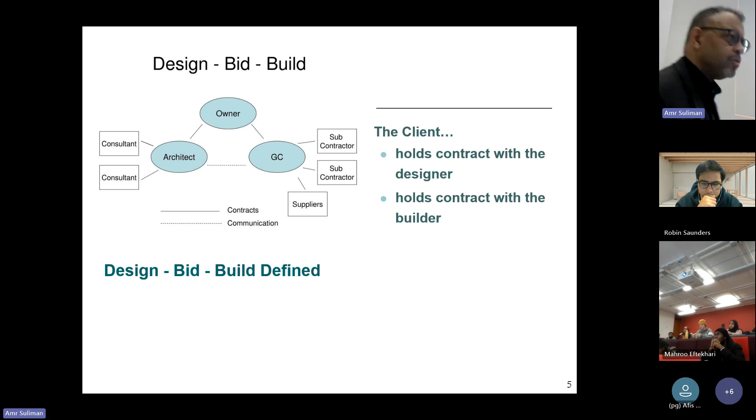And that arrangement, and I can use this guy to point, eh? Yeah, the owner hires architect engineer and hires a GC, a general contractor or a main contractor, and the owner maintains contractual arrangements with those two parties. So you have this triangle formed of the owner, with design on one side, construction on the other side, and there's communication between the designers and constructors, but they don't have a contractual relationship. And that can become kind of important in terms of getting things done.

But in that arrangement, because the owner, the client, has the contract with those two parties, they hold the contracts, they warrant that the design is suitable for the intended purpose. It is expected by the general contractor that the design provided to them by the owner, prepared by the architect and engineer, will get them what they want, will get the owner what they want, that it's a proper design. Keep that in mind as we get to design build. In this arrangement, the owner is responsible to an extent for the architect and engineer's work in the context that the architect and engineer are agents of the owner. Now, if the architect and engineer make mistakes, the contractor would sue the owner, and the owner would go after the architect and engineer for the mistake. So that's part of the process there. But anyway, the owner has to manage that relationship. Okay.

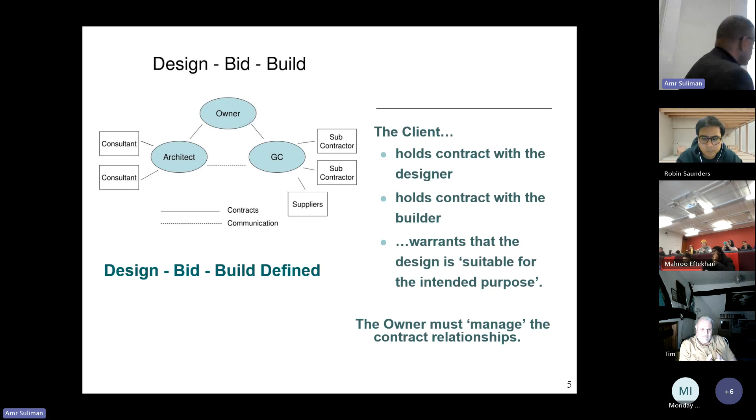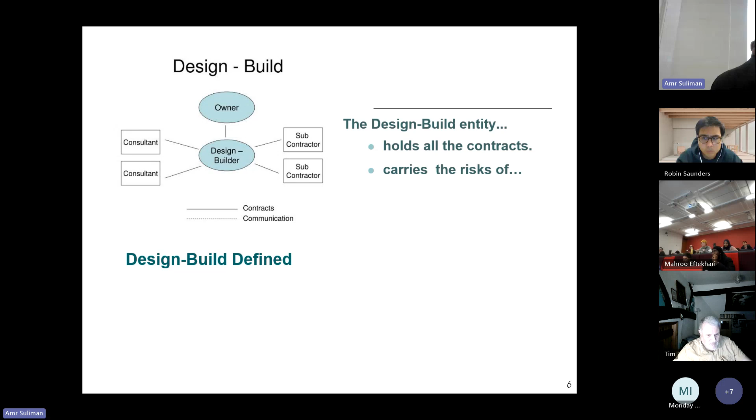In design build or design and build—in the US we just use a dash, but it's the same thing—in a design build arrangement...

The owner contracts with a designer-builder. That designer-builder, in most instances, will have all of the subcontracts and may indeed have the consultants, the architect, the engineer, and all of the subcontractors for mechanical, electrical, and other building systems.

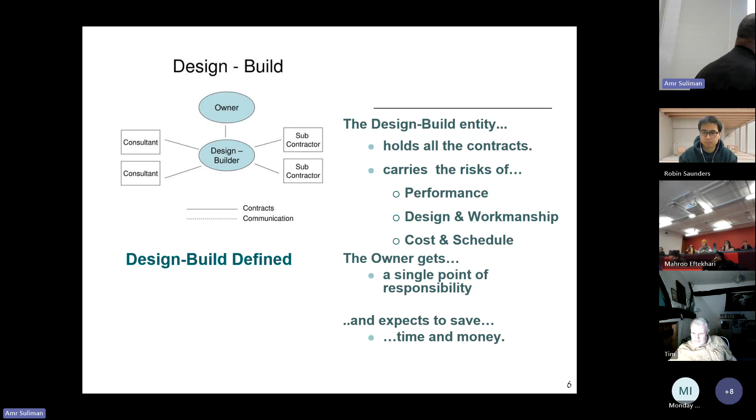In that way, the owner's relationship is strictly with that designer-builder. Because of that, the owner is not necessarily responsible for the integrity of that design, since the owner is not providing it—the design builder is. That can become very important because of issues that can arise with understanding or interpreting the design and properly getting the project built.

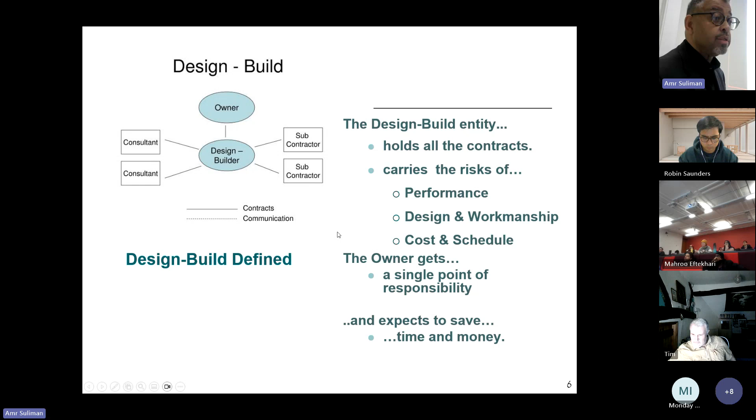So why would an owner want to do that? Because it's a single point of responsibility—they only have to talk to one person. And because the design and construction process are combined, theoretically you are going to save time and money.

That's the question here—this is where you theoretically save it. In theory, because I don't do detailed drawings and specifications, which are used to bid the job and give to a contractor to put together a price, the owner should save time. The project should save time, right?

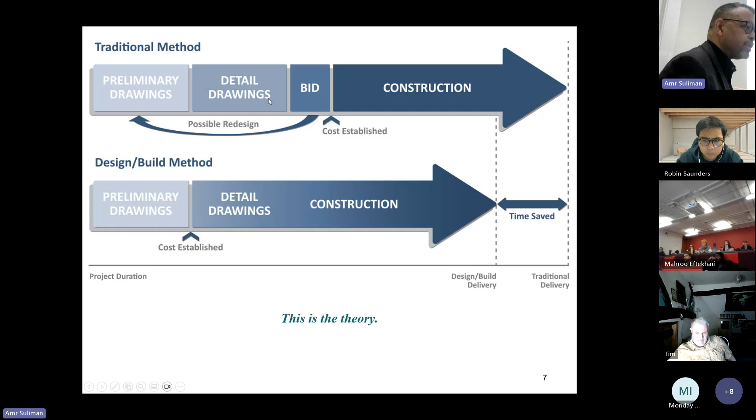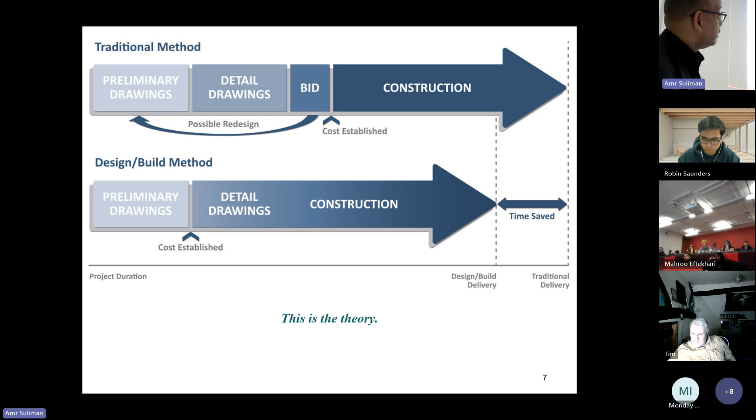Does it save time? It's a theory. I'm not going to say it doesn't work, but that's the premise. You get your project done quicker, and time is money in many instances—there's a dollar value associated with that process. So that's why it's done.

Now there are some concerns as to why you would not do it, and some of these concerns pop up in the UK as well as in the United States. One of the principal reasons is that architects and engineers generally are professionally licensed and registered to provide the service, while contractors in many instances are not licensed in the same way. So you could have what are considered professional services—design—being provided by what might be considered non-professional entities.

If the contractor owns the contracts and subcontracts the work to designers and engineers, that's a concern. The concern about the professional services issue is that professional licensure requires a commitment to public health, safety, and welfare, and that supersedes all the other stuff you might do. Anything else you might do, if you have a license, the public health, safety, and welfare issue rides predominant over all of that as a design professional.

And so some concern can be had in a design build arrangement, whether or not that commitment is still remaining paramount in the whole process.

The other thing is, when I showed you the picture of design-bid-build, you have an owner with an engineer on one side and a contractor on the other. Often there may be discussions or some disagreement about which pathway to go on a particular design element, or what material to use.

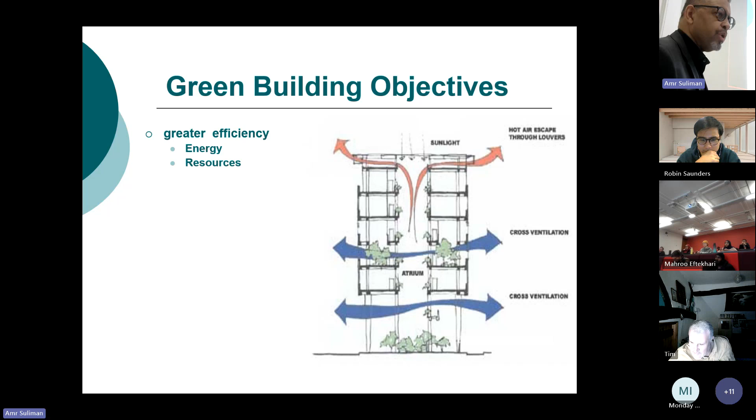So what about the green building stuff, which I'm sure is the thing that makes people get all excited? Green building objectives - we're trying to achieve better efficiency, better use of energy and resources, energy and water mostly. Sorry, I have an accent from the United States, so I talk funny. But that's probably the predominant general interest in green buildings or sustainable design. Anybody work on any green buildings here?

Okay, so a big item that's happening more and more now - I believe you have a mandate in the UK for a life cycle cost assessment. And there's some discussion about what's called cradle to grave, or actually cradle to cradle, and the idea of dismantling the building and recovering, recycling things. I want you to think about that for a moment. I'm entering into a contract with a person today about the design and construction of a building, and they have to guarantee some level of recyclability which might occur 20 or 30 years from now.

I could see where that would get a bit dodgy possibly. I'm making a bet on what I'm going to be able to do with that stuff 30 years from now. Do you feel lucky? That's kind of a nice thing. But anyway, that's a happening thing here.

One of the other big pushes is, of course, green buildings, healthier indoor environments, indoor air quality, and the broader spectrum of indoor environmental quality, where you get into sound and light and everything else. Waste management during construction, and to an extent in operation, we should have less waste.

Productivity—one would assume, and it's documented, that it's rational when you think about it: if I have a nicer building, people will work better in that nicer building. They will feel better, they will work better, they'll be more productive. And if it's a healthier indoor environment, they will have wellness, they will feel healthier. I think those two are very common and rational reasons to do this.

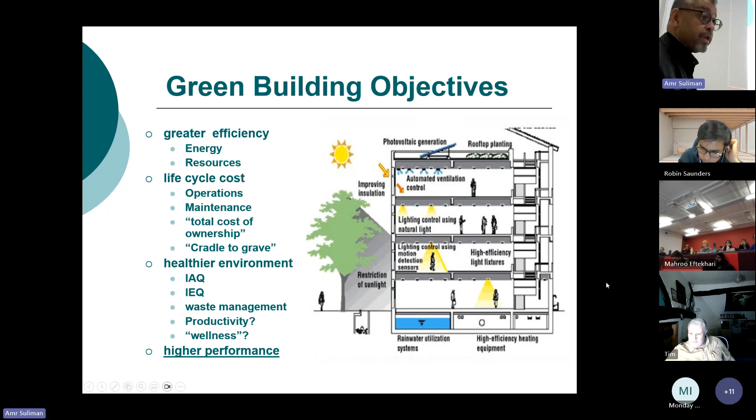The UK worked in BREEAM, the US has LEED. There's LEED here too, and BREEAM there too, but BREEAM is probably considered a leader in this place. Recently, I think they bought CEEQUAL, which was infrastructure. There's also the Home Quality Mark. But it's a very similar system for rating buildings in terms of quality—both in design, construction, new construction, in use, and then of course in renovation work.

Where are we at? Little cursor. There you go. I can't find you now. Oh, you won't. There we go. Boy, that's interesting—it wouldn't move over in certain spots. But anyway, there we go.

So why do we do this? There's the environmental side—if we can improve water and air quality, conserve natural resources, reduce solid waste. We all know the reasons why we do green buildings from an environmental perspective. We understand the reasons from an economic perspective. And then there's a community or social benefit element. So you could say three Ps: people, planet, and profit. You could talk about ESG: environmental, social, and governance—different variants of trying to do well while doing good. There's a lot of benefits to that, and we're experiencing issues related to climate change, so there's a lot of implications. That's why we want to do this.

You've got, I think, a more rigorous regulatory landscape here than we do in the US. But one thing I find very interesting is design for performance. Typically in the US, and the legal systems are very similar, design and construction is considered a service, and performance is hard to guarantee. In fact, in the US it's nearly impossible to get insurance for that, because that would be like a doctor guaranteeing the outcome of an operation—can't do that, things could happen. Or guaranteeing the outcome of a courtroom trial—can't do that either.

I have no idea whether you will be found innocent or guilty, no matter how good a job I might do as a lawyer. I'm not a lawyer, but they can do an excellent job and you could still lose. So it's difficult.

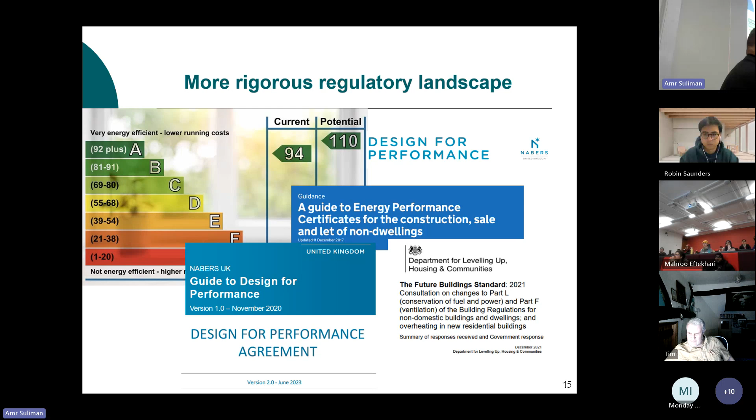Generally speaking, professional liability insurance in the US will not insure design professionals for performance. However, we are searching more and more for quantitative performance targets for our projects. So we now have a desire on the part of the marketplace that is at odds with how we've established the custom and practice of the industry works. I think we need to reconcile that. We'll get to that later.

But there is a convergence: resource and performance efficiency, sustainability or green, execution efficiency, getting jobs done faster and better, design-build, and integrated project delivery. And the term lean construction - has anyone heard that term, thought about it?

That is sort of a Six Sigma - you familiar with Six Sigma quality improvement process? It's kind of this continuous quality improvement, always looking for ways of doing things better. In the construction arena, you'll hear about lean construction. It is a similar thing, but you'll hear lean construction tossed around a little bit more than Six Sigma in the construction marketplace.

So, are there some tools that can help you with this performance issue? Now there's some mandated energy performance requirements in the UK for certain types of buildings, saying that a building of certain size and type shall not use any more than X number - I'll use my US metric, BTUs per square foot per year, or kilowatt hours per square meter. Same thing. Think about that.

I'm going to say to you that your building at 5,000 square meters shall not use any more than X number of kilowatt hours per square meter per year.

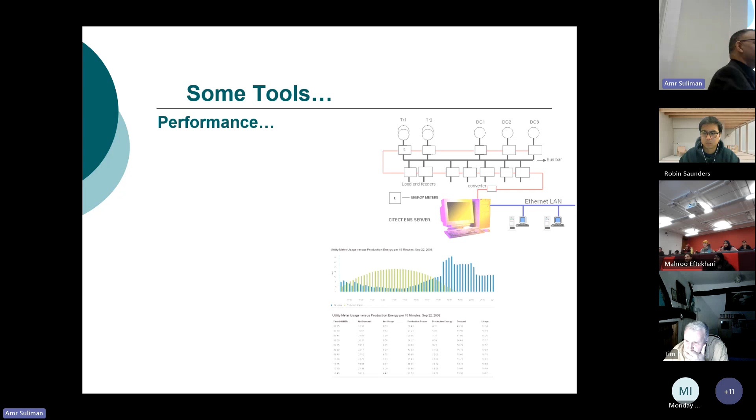So you need to be very clear and keep in mind, in design-build you do not have a full set of drawings and specifications. So if you're a design-builder working on that, you need to be very clear about here's the stuff we used to assume when we did the model that talked about how well your building's going to perform.

We assumed you were going to be open from 8 a.m. to 6 p.m., not 7 a.m. to 7:30 p.m., because if you do that, the model's wrong. We assumed a certain amount of temperature and conditions. We assumed you wouldn't leave the door open, okay? We assumed a whole host of stuff.

And actually, one thing I think is very important, and I haven't checked to see how they do here, I would expect they do, is typical meteorological years. What weather data do you use to set your model? I think the 10 hottest years on record have occurred in the last 15 years. So if I'm using some weather data that looks at 20 or 30 years, it is weighted low, right? Because it's got a whole bunch of years that we don't seem to be seeing anymore.

So I need to be very specific about what I'm using to develop my proposed project from a design-build perspective, because I don't have specifications and drawings the same way I might have on a design-bid-build. So if I'm building that, now if I'm an owner, I want to be very specific about what data I want you to use. I might need to do some research on what would be an appropriate value, because if I'm a smart contractor and I want to come in with a low price so I get the job, I'm going to pick criteria that's to my benefit, right?

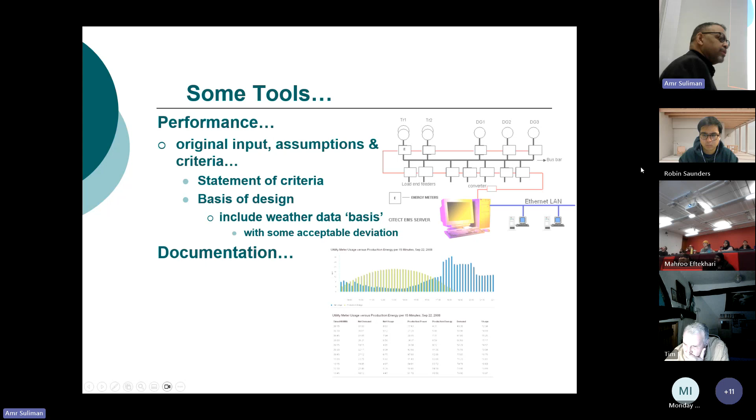So you need to understand that documentation, as I mentioned, you have less with respect to the design intent, because I don't have any drawings or specs, or I don't have as much. And that impacts an understanding of how things are going to operate.

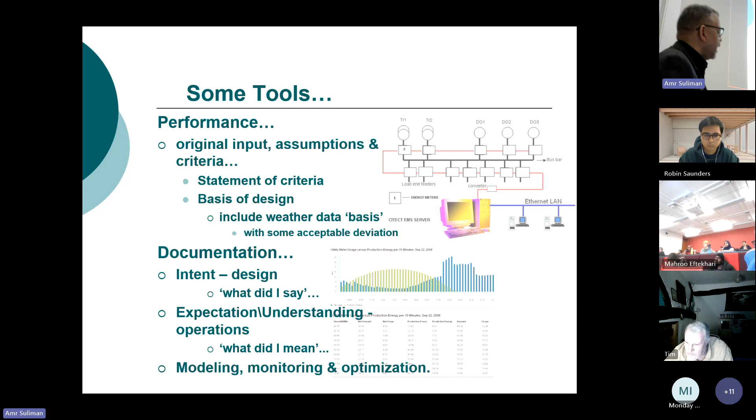What I intend to give you is often less clearly defined in design build, and what I expect to receive is often less clearly defined in design build. But we are looking for more accurate predictions of actual performance. So people are expecting sharper outcomes while using fuzzier and fuzzier input information. That makes it a challenge, a bit of a challenge. So now we have to think about how well we're modeling that, how well we're monitoring that, and the optimization of that. These challenges occur on both sides.

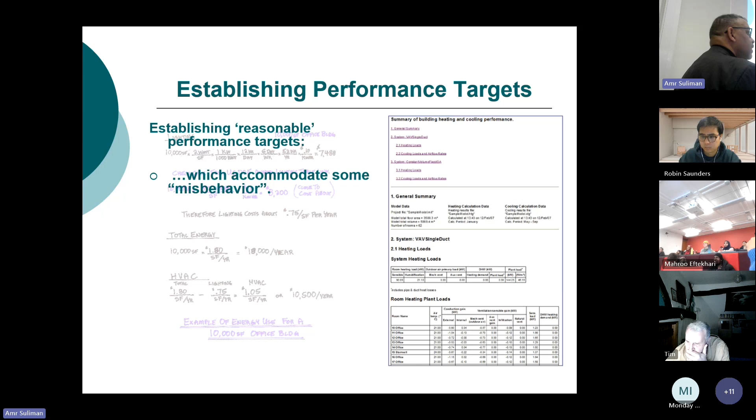I think you might want to set some reasonable performance targets. Remember, I don't have design documentation from an owner when I'm bidding this job. The owner just said, I want you to give me an office building. I have to fit 200 people in there. I operate from 9 to 5. We're going to build it. I gave you a plot of land. What are you going to give me? So you have to start setting some reasonable targets.

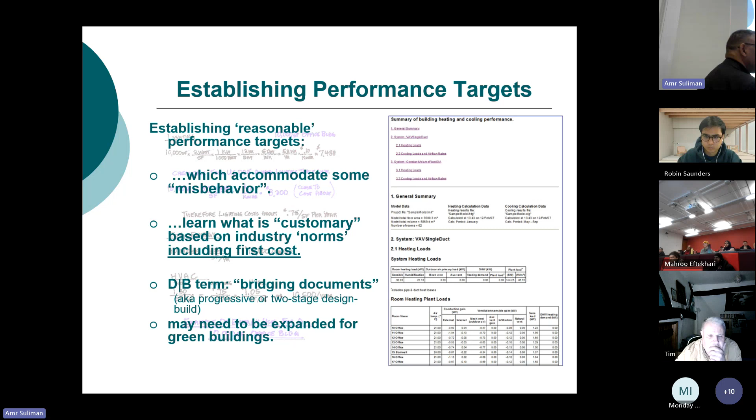In the US, we have something called CBECS, the Commercial Building Energy Consumption Survey, put together by the Department of Energy. They scan a whole lot of buildings, talk to a whole lot of people, and collect data on different types of buildings in different places in the country about energy use. I'd expect something comparable exists here, probably something similar. But you might want to think about, when I'm putting together my proposal as a design builder, what am I going to say I'll be able to get? How good do I think I'm going to be able to be? So I have to think about that.

One of the things I recommend a lot for design build work is progressive or two-stage design build, a two-step process. That often occurs where progressive is a little different, but generally an owner can bring in an architect engineer to develop a schematic plan of what they want, including some performance criteria, and use that to help guide the proposals they're getting from various contractors. Progressive works similarly, although that architect engineer may be assigned to or under contract with the design builder, or there's a novated contract process which allows you to transfer contractual requirements over to a design engineer.

A lot of times in the States, in the two-step process, we don't particularly like the engineer and architect who work with the contractor to be the same ones who worked for the owner, because they sort of know how to get around the game. They know where the weak spots are in the original proposal because they've already seen what's planned. So the progressive approach, or progressive design build, seems to accept that.

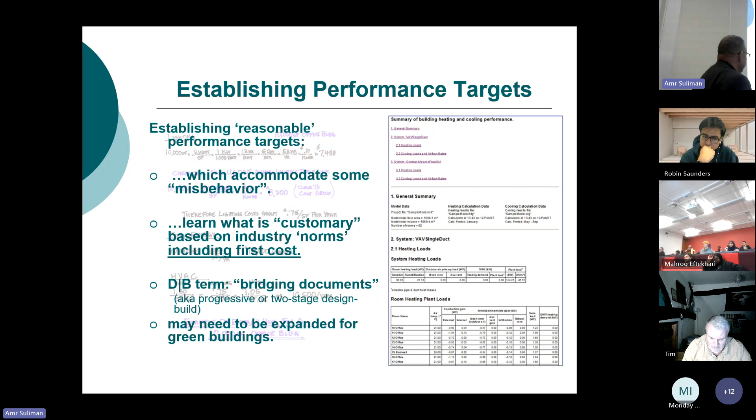But as a general rule for people looking at and targeting green buildings, which now means pretty much everything in the UK, they really need to think about expanding that process as a norm. Actually, I kind of feel like in certain respects we will begin to stop using terms like green buildings. There's only going to be buildings, and stuff we don't do anymore—the stuff we used to do, we're not doing that anymore.

I mean, I can't imagine anybody designing a new project that didn't have at least double glazing. I think you'd probably have a hard time buying a commercial single-glazed window now—that would have to be for historic restoration or something. It's like trying to not buy a low energy computer monitor. You'd have a hard time trying to find one, because you just don't make them anymore.

So, monitoring and measurement verification, M&V, that is a critical element of this issue of performance.

It is a requirement of certification for both BREEAM and LEED. You're going to have to do that, and it's going to be required in the UK market. Because you now have a target of performance, you're going to have to do that.

What I have not seen often in most contracts, because people are using old contract forms, is some component saying: well, I as a designer or builder have the right to audit what you as an owner have done in your operation, to make sure that when you complain my building uses more energy than we decided originally, that you didn't change your hours of operation, prop open doors, or fail to maintain your system, calibrate controls, set things, and change filters.

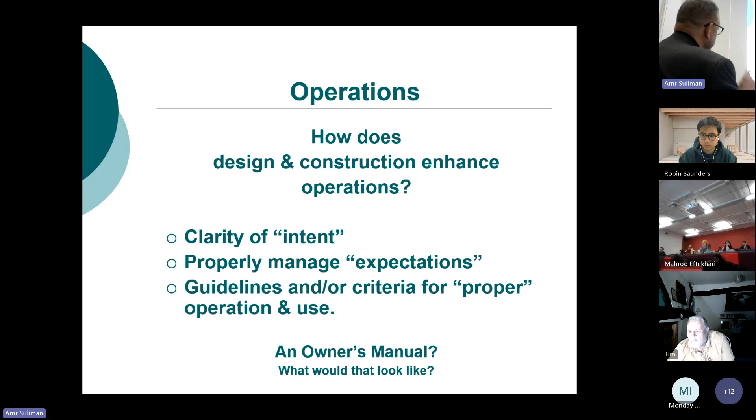I think we need to manage expectations—don't oversell what you're going to do. We need to talk more about proper operation and use, in that completion and turnover package. In operations, we need more than the standard traditional approach, where people collect a whole bunch of manuals for various equipment, put them in binders, and hand them to someone. That's great, but it doesn't tell you how those things work together, and that's going to be a very important element.

I think what we should be looking at in training programs is different methods and modes of operation, especially transitions in seasons—how we go from a cold start to a shutdown—because a lot of times that information is missing. These things should be done while you're executing the project. You should be educating the people who are going to operate it, how to operate it, so they understand what's going on while you're in construction. And I'd require them to sign off.

I have videotaped those training sessions because in most instances, an owner hires people to operate their building, and within the first 2 years, 30% of those people are gone. So whatever you train that group, 30% of that knowledge walks out the door with them. If you videotape the sessions, the remaining staff can watch that material. Has anybody worked with a fault tree study or a failure mode effect analysis? When something fails, use a failure mode effect analysis, or the 5 whys and the Ishikawa diagram, to figure out what went wrong.

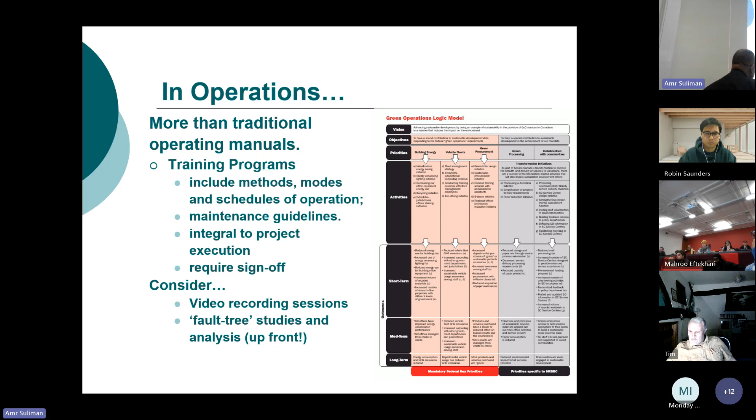Why? Figure out what went wrong. I think those are very valuable as an upfront tool to see weak spots in the design. But a lot of times it's not used until there's a problem. You can use it up front, you can preempt problems, head them off at the pass.

From a risk allocation perspective, you need to be very realistic. A lot of people like to shift risk to other people, but the problem is risk shifting costs money. If you're an owner and you're trying to make everybody else responsible, they're going to charge you for it. They should—if they don't charge you for it, they don't know what they're doing, and you're going to end up with a bad job.

As I said, in traditional execution, design risk is with the owner, construction risk is with the contractor, schedule risk and cost risk—it depends, because if people change designs or change requirements, that'll impact schedule and cost. In design build execution, all of those risks generally lie with the design builder, at which point they are going to make decisions that minimize their downside exposure, their downside risk. So you need to think about what you're going to get relative to that.

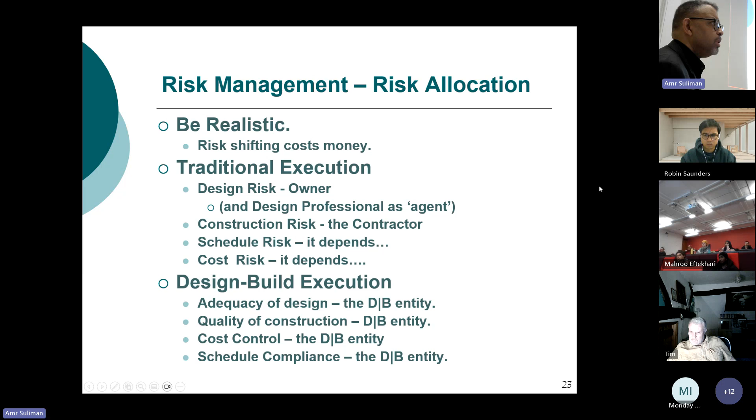There have been issues, I think, mostly in the residential construction market—heavily in the residential construction market—with design build and getting less than ideal product, less than ideal buildings.

Some industry trends. I am sure that you are all doing BIM or talking about it, right? If you're not doing it, I know it's a requirement, I think, in the UK. So everything's being done in BIM. BIM is a great tool, but it's a tool. And any tool can be a weapon if you hold it right—okay, so you can do good things or you can mess things up.

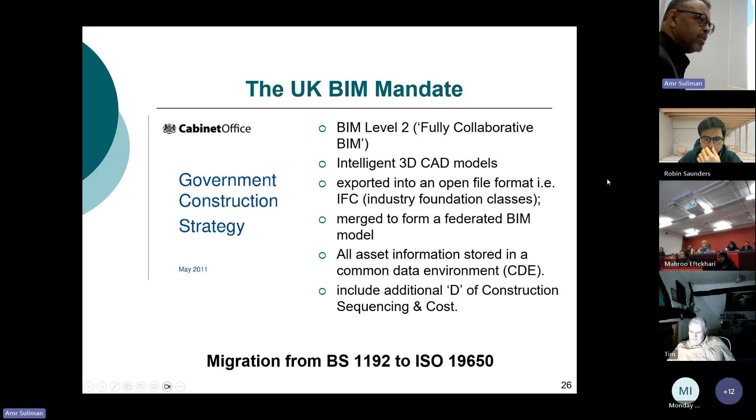But this is what's going on, and you're migrating from British Standard 1192 to ISO 19650, picking up the last bits of that, I think, now. The big item going on in the world of BIM is sequencing and cost, as well as energy modeling in BIM. So here's some expectations in your construction forecast 2025.

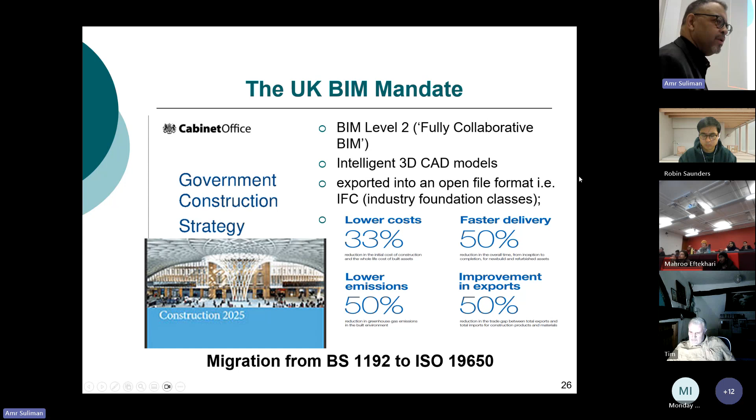The lower cost, faster delivery—I think people might be very optimistic about the delivery and emissions improvements on all of that just by using these kinds of tools. I don't think you're going to get that, but it's a good goal to set.

We talk about BIM as 3D, and we talk about 4D. 4D BIM is time schedule tied to your 3D model. I can have my model regenerate in alignment with my critical path methodology construction schedule, so when my model builds, it can build in the sequence that I would build the project. Why is that useful? Because if I change things during the project and I have a change order and I change that element in the model, you will see the impact of that on other things throughout the construction sequence.

That takes some time, and a question that pops up is, who is responsible for that? Engineers and architects, designers typically build models, right? Contractors do not. If it's design build, it might be one entity, so it might not matter. But when you are doing construction, who typically controls the schedule? The contractor, because the contractor is actually doing stuff. So a question becomes, how do I update the model? Who's responsible for that update? That needs to be worked out.

But anyway, right now, I guess the industry would say we're here, level 2 BIM. There is some build up towards it, including scheduling, but level 3 and beyond is where we do facilities management. As I mentioned, 4D is time, 5D is tying cost to that—the 5th dimension, cost. 6D would be energy or performance, and 7D would be facilities management. So that would be, as an owner, I now am using the BIM model to help manage my operations.

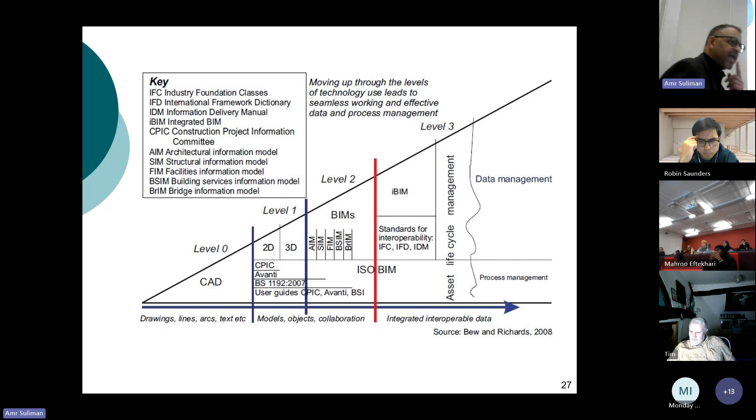One of the weak spots in that is a lot of people, a lot of owners' organizations don't have people who have skill sets with BIM, so they can't really use it fully. You know, and that actually has created some issues. I've handled a couple of BIM-driven problems.

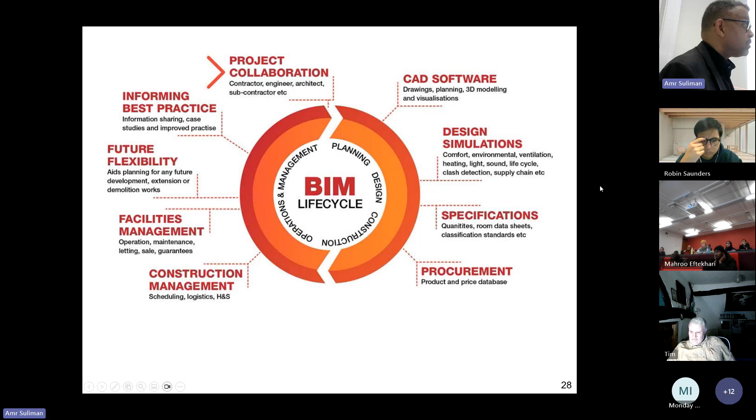With BIM, you get the ability to do simulations. You've got to think about it as a life cycle operation, but it's just a tool. BIM will not solve problems—it will not think for you. It's just a computer. Computers are really nice, but they don't think for you. So you're still responsible.

Modular construction—is anyone seeing any of that other than residential? Okay, modular construction, I think, is coming. It's going to become a big thing.

They build entire sections with duct, pipe, conduit, everything in that, and you lift those up into place in the field. I've seen situations where the ductwork has a barcode on it.

So it comes out to the field, the guy scans it, and the drawing tells him where to put it. That has some advantages because I can do all this fabrication in a shop—better quality control, nobody falls off ladders. So it's better safety.

I worked on a project where we made a whole bunch of these things and they were all about 1.5 inches too deep relative to the door frames of all the doors in the hallway that led off the corridor where all this stuff was. Well, now that seems like, it's not a big dimension, 1.5 inches.

Suddenly the doors can't open because they run into the bottom of this—because we can put a ceiling in, now you're two inches below. So you can imagine the massive change order, because all this stuff was pre-made.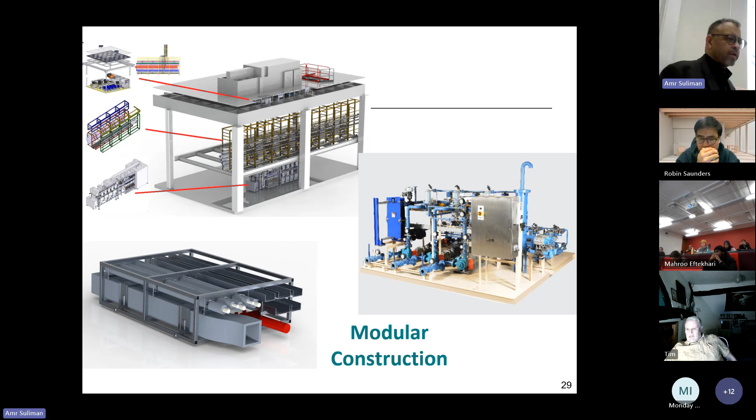There's a big issue of modular construction here in the UK for homes, and I've seen problems on that before. I mentioned lean construction—that's just continuous process improvement for the construction industry, like Six Sigma or ISO 9001.

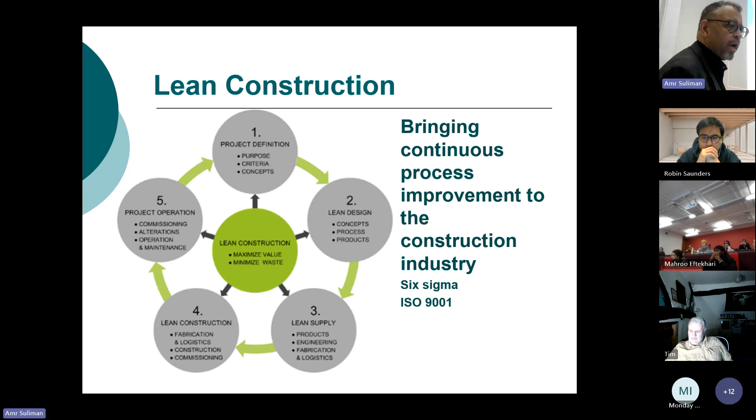So here you're picking up BS 19650 Part 6, health and safety information. Then you have modern methods of construction and design for manufacture and assembly. Actually, I've heard about design for disassembly in the manufactured goods world for some time now.

I think Germany did it for cars—so when you're finished with your car at the end of its life, instead of taking it to a yard where it's crushed or scrapped, you send it back to BMW or Mercedes. They take it apart and recycle the pieces. I expect to see more of that.

We've got a big push for embodied or embedded carbon in products. Concrete is a big one, and general materials of construction. Now you've got the low carbon concrete initiative—people are really concerned about concrete because it's very carbon intensive. And then there's BS 8670, a building safety competence framework, which is an overall operating thing.

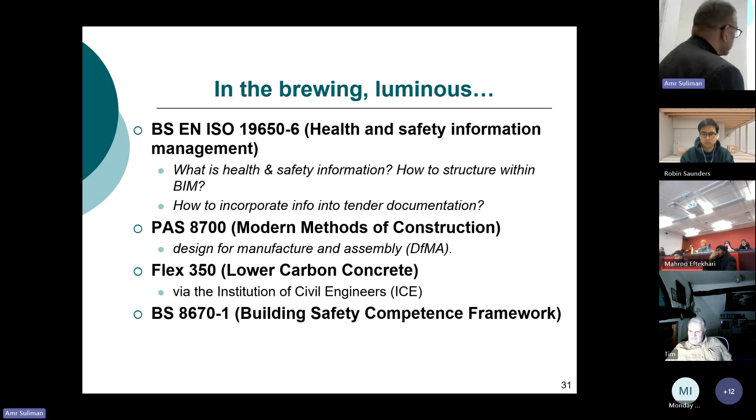So that's new stuff that's going to be happening in your marketplace. In the US, I'm not worried about this because we don't have that—not yet. We'll have something similar though. So, sustainability.

And the value of it, beyond making you feel good, is going to be the actual predictive performance that people want—quantifiable—and your ability to recycle your buildings. That's going to add some challenges to our work.

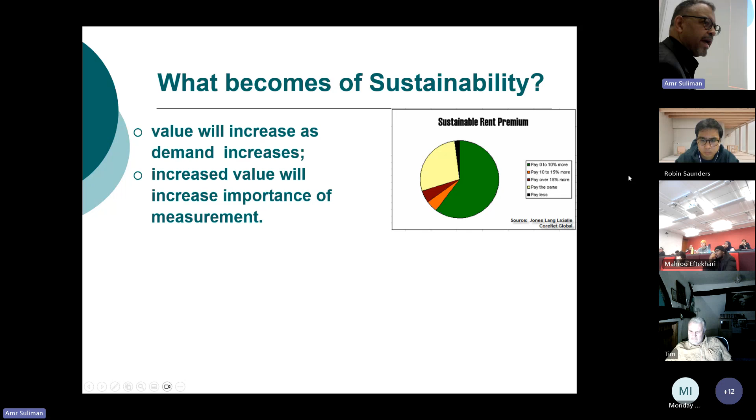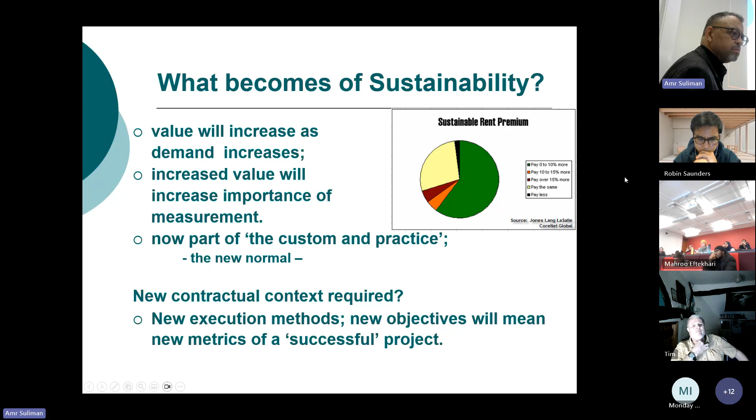As I say, the new normal—our contracts, I think, need to be modified to accept that concept, because right now they don't. Contrary to popular opinion, a lot of times the law is reactionary; it follows behind what the industry is doing.

It does not lead. So design-build, I think you will see it grow in its use. I think it becomes challenging because many organizations are thinner—they have fewer people who have done capital projects. They've reduced those staff, so they know less about the building process, so you might need to explain a bit more.

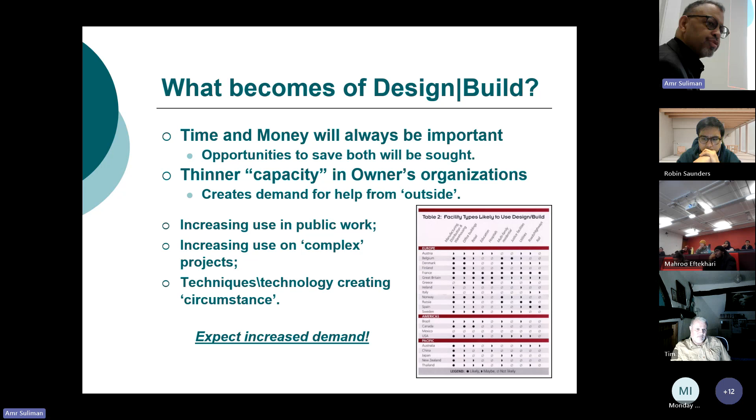I'm going to see an increase in public works, which we see here in the UK, and on complex projects. Often people assume it's simple projects. I used to work out in the Bay Area, California. The semiconductor and biotech market uses a lot of design build, but they have very specialized contractors who are very, very good at it, and that's what they do. They also use, interesting enough, in the semiconductor world, a two-step process for wafer fabs.

There's usually a building package and a tool package, called tool package, process package, because that equipment changes quickly. I can see similar approaches for hospitals. The equipment inside a hospital changes constantly. So it's very difficult to start a job that's going to be completed in construction two years later and make sure that the thing you thought was going to be your nuclear magnetic resonance machine is set up exactly the same way two years from now, because it's likely to change.

Here is something I've seen from one of your leading law firms in this area. People want net zero buildings and whole life sustainability. So I think contractors, especially on design build, are going to want to see their obligations better defined. That cuts against the grain of design build because you don't have that definition. I can see some design build contractors rejecting aspects of the owner's requirements because they say, what you've asked us to do, or what you've given us to do, we cannot guarantee it being done. So I can see some challenges.

Back to that issue of, I'm going to be able to recycle that building in 25 or 30 or 40 years. And then this is a big one. You've had the past couple of summers some weather that would be considered not the norm for England, right? Well, hot. We just had in Florida, in the States, two 1,000-year hurricanes in a matter of about 14 days. So one of the big elements in contracts is what you call force majeure, act of God.

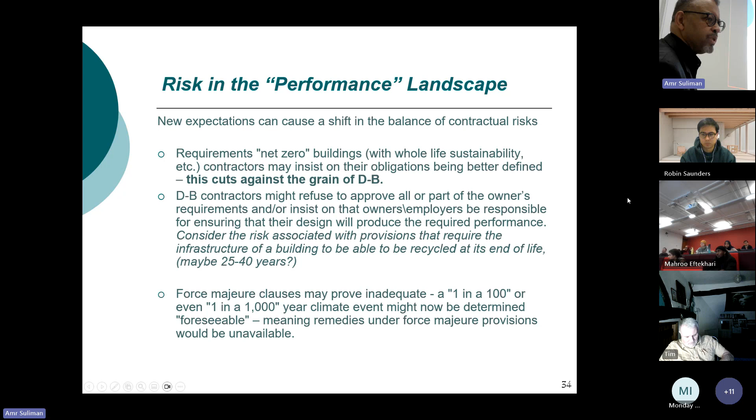So if it's been hot for the past three summers, when you're designing a job for next summer, how are you going to say, I'm surprised by it being hot? Really? Not a force majeure. That's what happens. The force majeure argument is weakened. So that's what I think is going to happen, and contracts generally accept that.

So I think design build green projects can work well because of the integration. However, the arm's length position of the owner can be a problem. They get to decide or ask questions about things after the fact, and it's expensive to change after the fact. One item that pops up in my mind is certification on buildings.

In most instances, I think this is true of BREEAM, they are not a party to your contract on the project. So they have no particular concern about the timeline of you finishing, because it's not their problem. So if they take an excessively long period of time to give you certification, but your contract says I'm going to have this level of certification in order to be said to be finished, how do you reconcile that? You have someone who controls whether or not your project is officially complete, who doesn't have what we would call skin in the game on your construction schedule.

They don't have it. In the United States, the Green Building Council, they're not party to anyone's contract. So there have been instances where people have not gotten certifications in certain periods of time, and there might be tax or zoning benefits to getting certification on your building. It hasn't happened, and those tax benefits disappear. Well, that could be worth a couple million dollars.

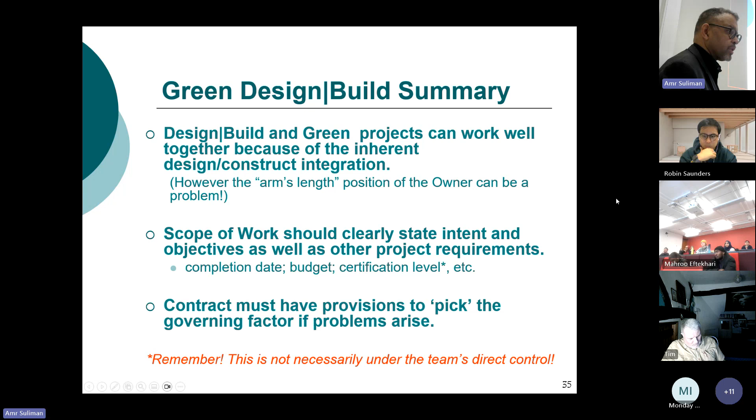So any questions? I'm the last talking head for all of you all day listening to talking heads, and it's late at night, you want to go home. So now that I've sufficiently scared everybody, I said I'm going to go into anthropology or something.

I would say the regulatory requirements coming here are going to be some challenges. But the commissioning—when you buy a car, you get 2 or 3 years warranty, but if you get a building, there is no warranty like that. Typically you have at least 1 year, but I think commissioning, if I'm an owner, I want to write that in.

One challenge I find on the commissioning side is that when you have a bigger project, typically the manufacturer of big equipment—chillers, boilers, that stuff—their warranty starts the day you start that chiller up. That could be well before commissioning is finished. A lot of times people will put the boiler in to provide temporary heat during the remainder of construction. Once I start that boiler, the boiler manufacturer says the warranty started because you're using my boiler.